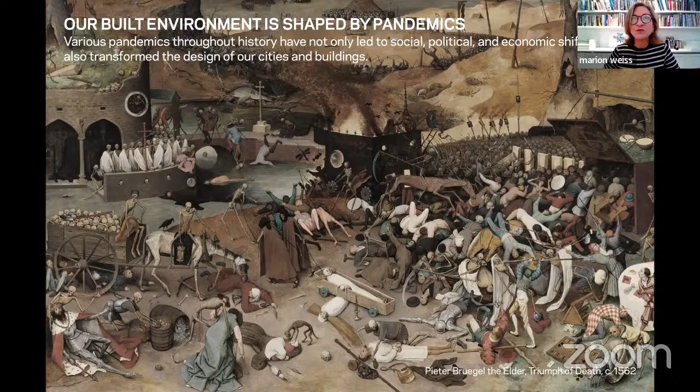In some ways, you could say the absence of breathing room sometimes catalyzes innovation. Think about the pandemics that have been part of our history, which have actually forged larger ideas about what healthy practices might be.

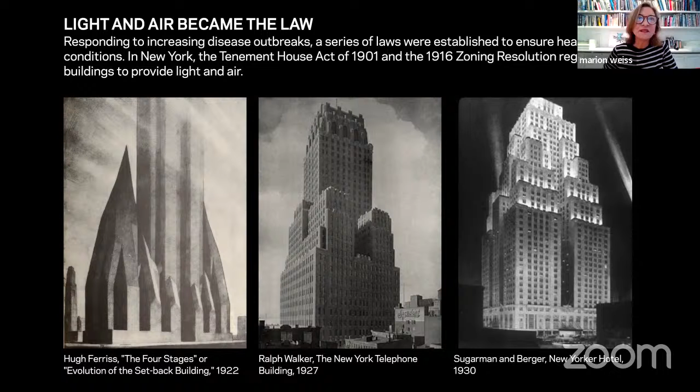Still isolation, or the 40 giorni, 40 days, was the origin of quarantine for people traveling to avoid the spread of bubonic plague. Again, these are ideas of tragedies enabling innovation, and the idea of light and air becoming law after various failures.

That expanded to larger ideas of urbanism, landscape, and ecology, coming into being with Central Park, designed with Frederick Law Olmsted's idea as an allusion to medicine, saying we need lungs for the city too.

That breathing room for the city has really forged an indelible relationship between high density urbanism and the opportunity for breathing room in our city.

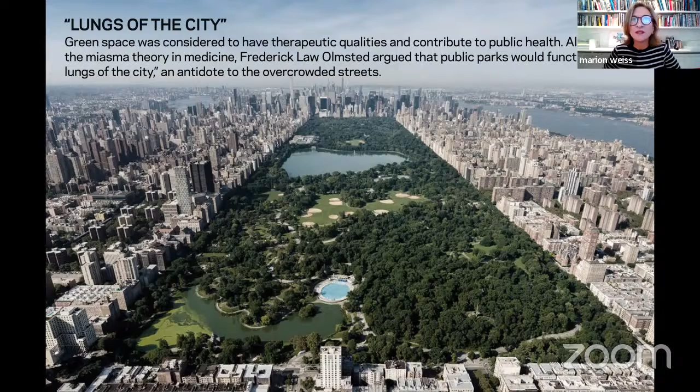A preoccupation that I've been exploring along with my partner is the question of what models exist that have a DNA of complexity—if you will, looking at Park Güell by Gaudí in Barcelona. We've been doing a series of drawings and studies to look at what multitasking infrastructures look like when they're open-ended.

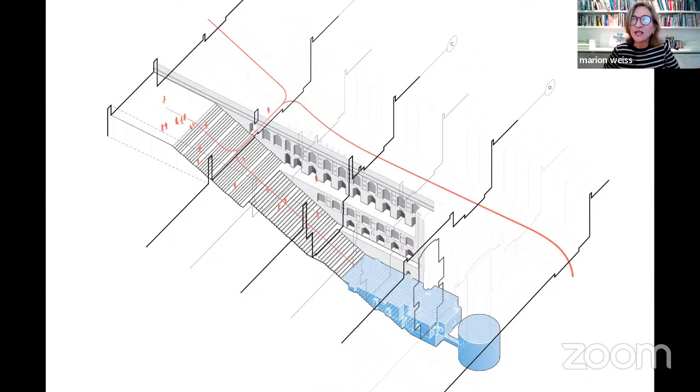And territorially expansive. This is the Khaju Bridge in Isfahan, part water retention and part social infrastructure. And Agrasen ki Baoli in New Delhi, India, formerly a place of water gathering, now a place of social engagement.

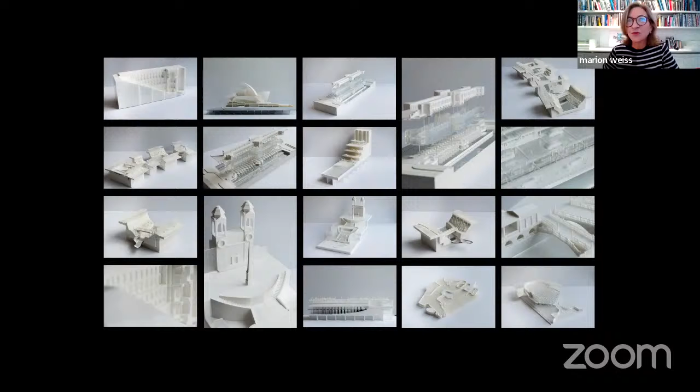This sort of examination—these are models done by my students at Penn, in part for exhibition at the Venice Biennale—looked at the figure, the volume, and the identity of spaces of multitasking infrastructure, both urban and architectural.

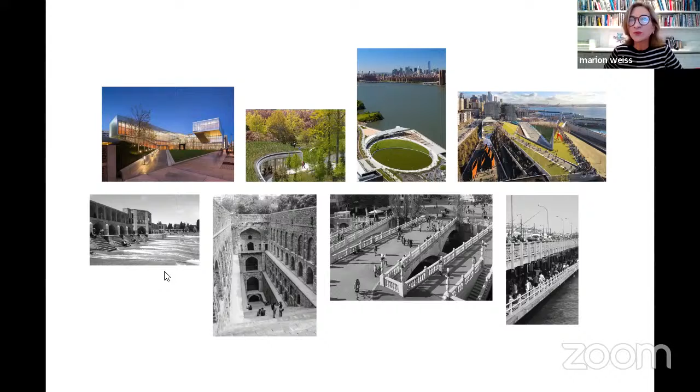Bringing this work to the Venice Biennale, we were invited to consider lines of movement in our work and in these infrastructural projects that have been originators of some of our ideas about multitasking infrastructures.

As we started to look at that, we wanted to create a space that had its own breathing room, where the dialogue between these sources of inspiration and our own work are seen not so much one-to-one, but in dialogue in the path of passage.

Constructing a setting or a room—literally breathing room—for these ideas to come together, brought these models and investigations into dialogue with our own models, in this case the Brooklyn Botanic Garden.

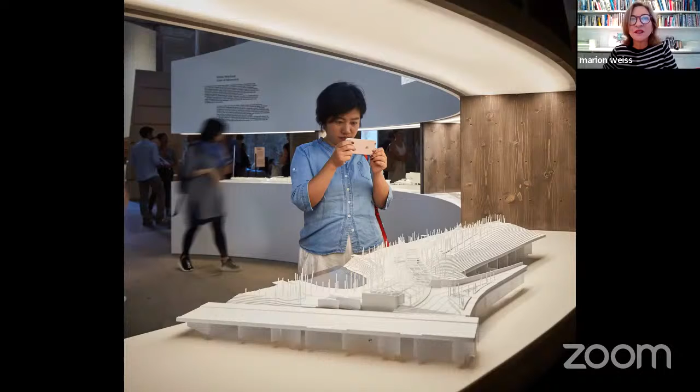That could be part of the journey people take walking through the Corderie at the Biennale, where they could walk through and discover these ideas of public natures and multitasking infrastructures.

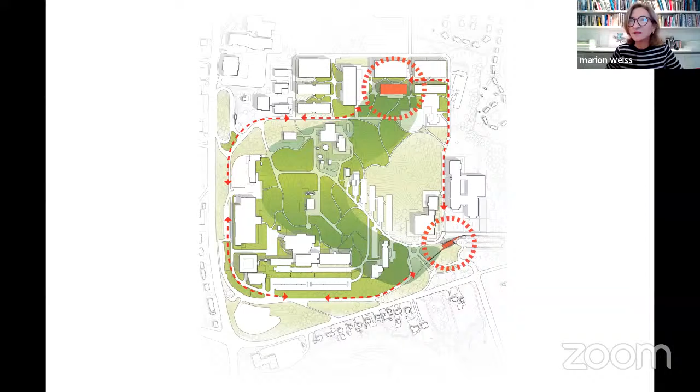One is for Novartis, a pharmaceutical company in Basel, where they were looking at their North America headquarters with new eyes, wondering whether their security entry was the right message for welcoming people onto their campus. We started thinking about what a gateway might mean on this topographically diverse campus, and began reconsidering the fence or barrier around the campus, needed for security, as a place of passage and shelter.

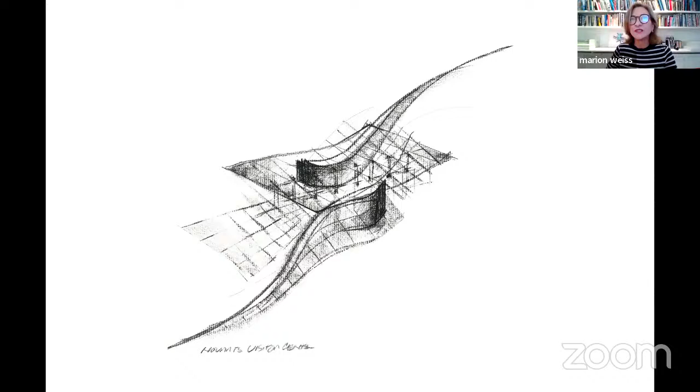As we looked at that hybrid between passage and shelter, we imagined it at night as a kind of celestial soffit, a luminous expression of welcome for the campus. It's a place where what was once a checkpoint is now, in a sense, a place of respite and pause, also a place of passage.

When one is literally on what we call the land side, like an airport's airside and landside security, there's a place to wait to be picked up by the shuttle that brings you through the campus. Again, what must be there as a fence for security takes on a different role as a topographic separation, one that stretches into the identity of the rest of the campus.

Now, the idea of creating breathing room for innovative thinking at Yale University came into focus in a very different way. The engineering disciplines, computation and science at Yale are newer and, in a sense, less expressive of what the campus has wanted to be about, which is a place of exchange.

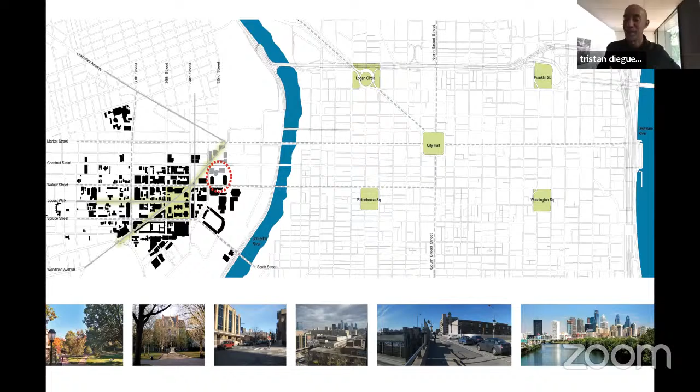Marion, can I translate the Novartis and the Yale projects? Sure, absolutely. Sorry for interrupting.

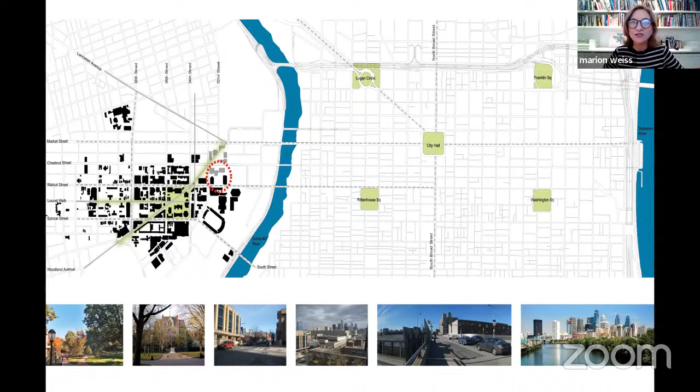And so when we looked at the opportunity here, we found that the site for the Singh Center for Nanotechnology didn't have any greenery, which had been so central to the development of the city of Philadelphia, but also to the identity of the University of Pennsylvania's campus. And as we looked at this site, which had been a parking garage, we realized that there was nothing about it that suggested it was part of the university.

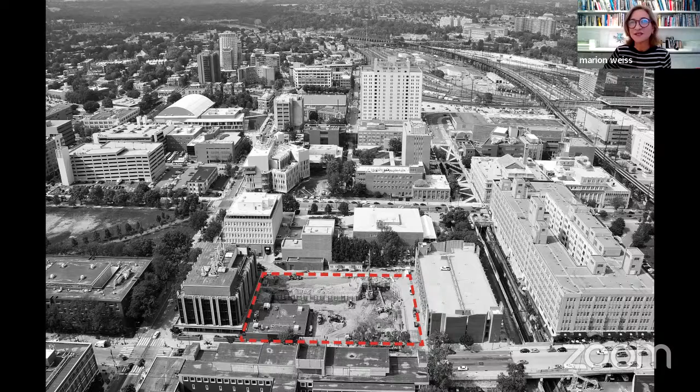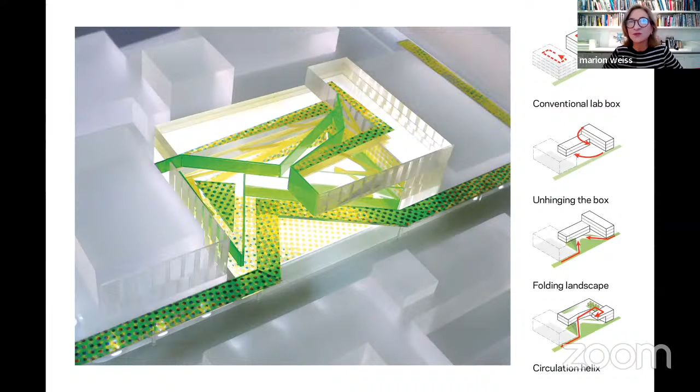And existing at the edges, we wondered what might enable us to look at the kind of constraints of vibration, electromagnetic interference, which is problematic for nanoscience, and use that need to actually push parts of those laboratory spaces away from those interferences to create an opportunity potentially for unhinging the kind of conventional laboratory box, to create a space that could include landscape and places of collaboration that could actually form a new identity for the campus.

And what's interesting here, and maybe hard to understand, is that it's very simple lab bars to our left and to our right. But the one element that didn't need vibration sensitivity tuned precisely was the place of gathering, which is that which is elevated to overlook the campus.

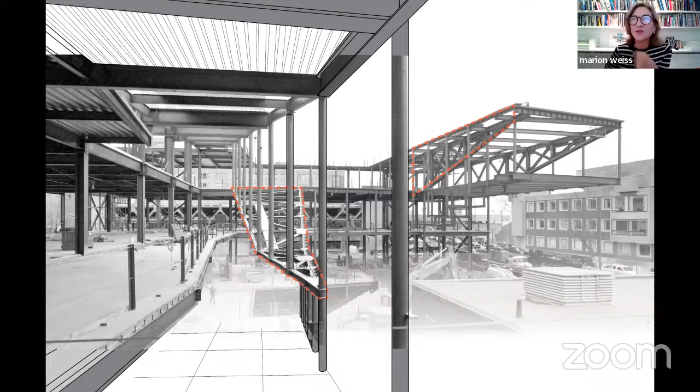And you can start to see that cantilever reaching out, but drawing you in. That engineering feat, if you will, is cantilevering on the right, but also hung on the left. So all these particular efforts are actually eliminating columns so that we could free up public space.

That public space in the entry area confronts you with a wall of orange or saffron. And in this case, this color is needed in the glass to protect the nanoscience and protect it from the ultraviolet lights that would destroy the research.

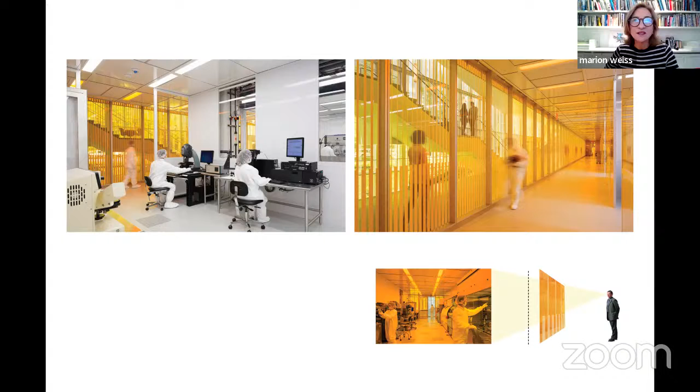And yet the people who are behind that glass now have a vista into the public area, into the landscape, so that their particular research and the engagement of people behind that wall can be shared, even though it needs to be separate, of course, for the kind of clean room requirements.

Because lab buildings are very tall from one floor to the next, and elevators need to be hidden very far away to avoid vibration and electromagnetic interference, a staircase needs to become a destination in and of itself, because most people will need to use the stairs. So for us, in this very long hike, we created collaborative terraces on that staircase that connected each level.

Similarly, we wanted to say that most scientists who tend to want to stay in their labs really need to be drawn together. By being able to see and be seen, those vistas across these many floors create a sense of community that can convene finally at the very top terrace with an overlook of those stairs, that overlook the campus and this room, if you will, which becomes very intimate while it's elevated over the campus and can actually capture vistas of the city.

That kind of ascending topography of forms is also kind of a crystalline, chameleon-like form with this externally acid-etched glass. We're also drawing light down into the lower level to enable the landscape to be the convening element from the city all the way up to the terrace.

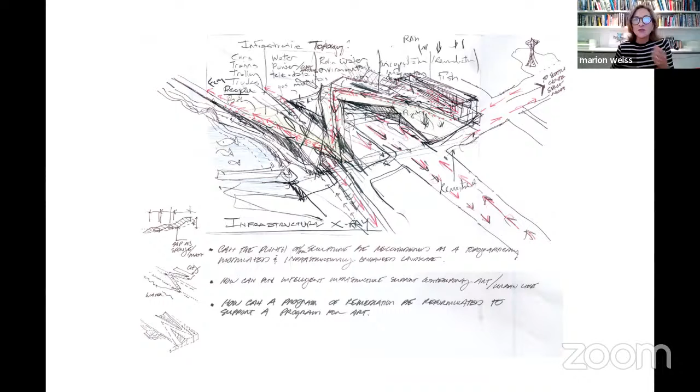In this infrastructural X-ray drawing, we started to think about what we ultimately were fortunate to be able to do: work with excavated land from a project downtown that had to pull earth out to create parking. We were able to take 200,000 cubic yards of earth to create this landform that could connect the city finally to its water's edge.

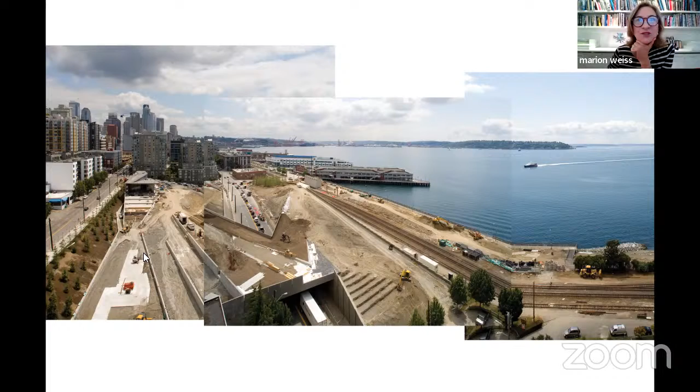Using highway construction techniques here, MSE or mechanically stabilized earth, we also created a series of concrete layered walls that are actually overlapping so that in an earthquake, they could still move around and not be damaged. But ultimately, it was about creating a topography that would enable art to have room to breathe and the community to have room to enjoy the Olympic Sculpture Park's vista, which are the Olympic Mountains, hence its name.

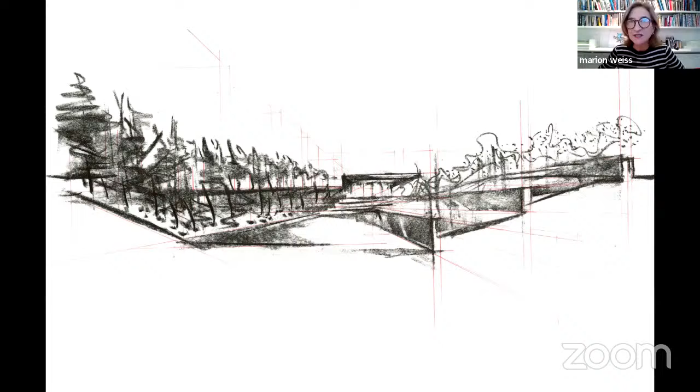But really, the possibility of becoming a new destination, inventing, if you will, land that didn't exist and creating topographies that could actually filter these separations and offer something new. You can see here, we were interested in that kind of valley area that we invented to create a place that was somewhat more intimate.

So Richard Serra's piece here, this great steel, Corten steel piece called Wake, is protected within the valley, looking up at the pavilion. And yet, while it might be somber on one day, it could host a jazz concert on another day, particularly in the summer when Seattle doesn't have much rain at all.

And yet the building itself, the pavilion, in many ways unfolds just the same way that the landform of the earthwork does. That earthwork is one that actually simultaneously enables you to drive into a garage on the left or ascend it to a crossing.

That crossing enables you to say that just as you're crossing the kind of highway overpass, that point is not something to conceal, but to celebrate, and in many ways enable those on the roadway to know that they're crossing under something that is not a standard overpass, but something altogether different, with Calder's eagle in the distance.

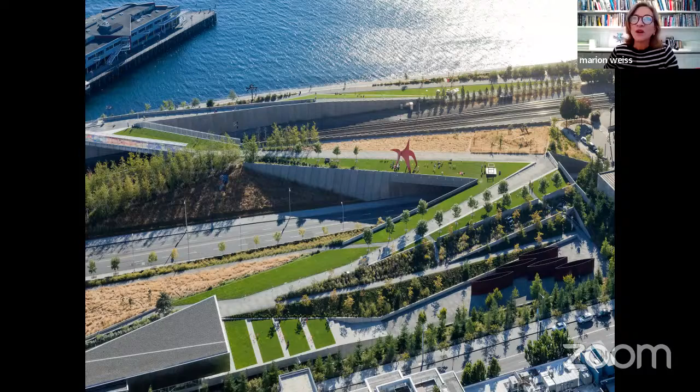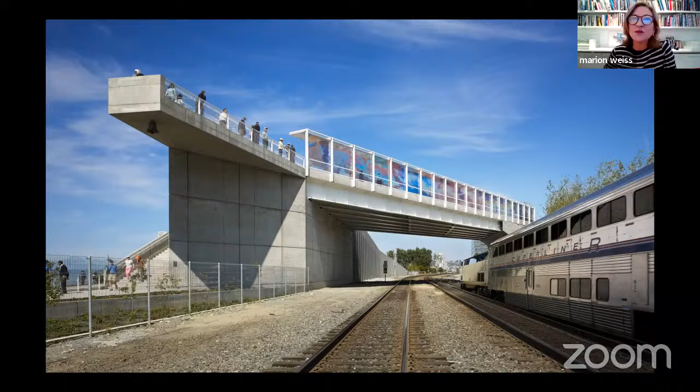Again, though, the simultaneity of all at once is what we're interested in—all at once and yet one at a time. The connections of art, landscape, trains. Here with Teresita Fernandez's work, Cloud Cover, we created a framework for her work where that Seattle cloud cover element could catch beautiful shadows on these walls, and in conjunction with these aspens, create an ever-changing chromatic identity for this waterfront landscape.

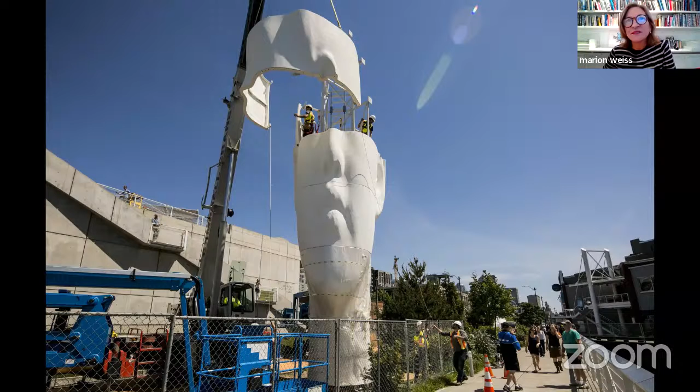And just where the seawall was collapsing and the Army Corps of Engineers said we couldn't build on this piece of property—here you see Jaume Plensa's work—we were lucky enough to finally get a federal grant to build something that would enable us to take this parking lot down and actually pull back the earthwork and the resistance to create a new beach that has salmon habitat in mind.

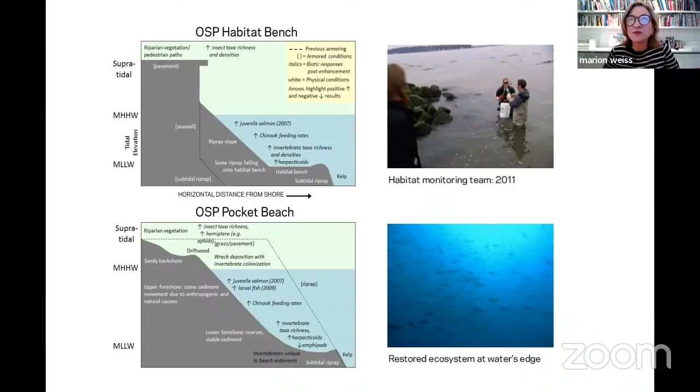And in so doing, creating an earthwork, an intertidal earthwork that finally stabilized the seawall and provided salmon habitat. In fact, they're still monitoring it—you can see it at a midpoint here, proving that juvenile salmon are doing very, very well. And yet that real opportunity for us is looking again at this idea of an urban infrastructure that is at once a place of respite, a place of breathing room, and a place of ecologies to connect the human condition.

So again, advocates, allies, and loose fit amplify peripheral vision. And I wonder, Tristan, do you want to translate before I jump in? Yes, I was going to ask you.

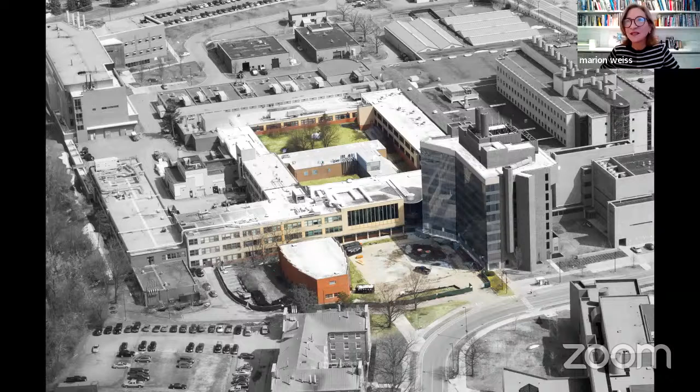When we were invited to think about adding new classrooms for the growing classes, we said maybe before we add something, we can take a few things away and create a place where the community can connect. So we suggested taking down four buildings in the middle of this strange campus, to create a place we might see not only as this kind of fortress of not very good tall buildings and something that looked like a strange hotel arrival, but actually turn it into something that felt appropriate for the Academy of Cornell University.

So we reclad the research tower, opened up the public realm for a library, and created a place of passage and landscape, a kind of water retention landscape as the point of arrival. Before, it was somewhat formidable, and after, you could say we had a chance to create something more compelling by taking what had been a back area filled with strange buildings that we removed, so that we could ascend now to a connected landscape.

So it really is a landscape to landscape connection, and an indoor-outdoor world that's wood-lined and warm, connecting on the right those in the hospital, and on the left those in the clinical labs.

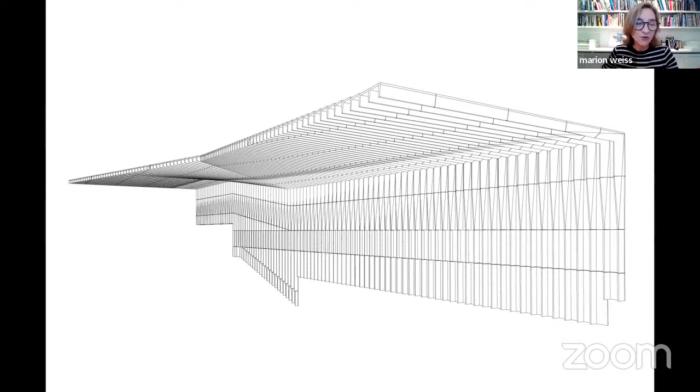But thinking about what it means to convene and create a kind of soffit of connection and warmth at Cornell, where it snows much of the academic year, became an exercise in looking at the possibility of something that could also be acoustically perforated in this very hard surfaced area, and then also baffle that sound, because they were going to be using this for many sorts of events and conferences.

So while most of the time it is enjoyed as a kind of loose fit place for gathering, it is also a place that can take the kind of high density traffic. Here you can see the acoustical wood and the fins handling sound, but offering an element of warmth.

And from the upper level, this is the public level for the hospital. It too has a sense of being connected as opposed to disconnected, because from the hospital, you're really opening back your vista to the core of the campus.

That sense of vista for Kent State Center for Architecture and Environmental Design becomes very different in this case, not so much about removing, but actually looking back to the history of this area of Ohio where factories in many cases had been abandoned. Yet the idea of these simple brick factories with their aerial lines of skylights was that they were great places of collaboration and production.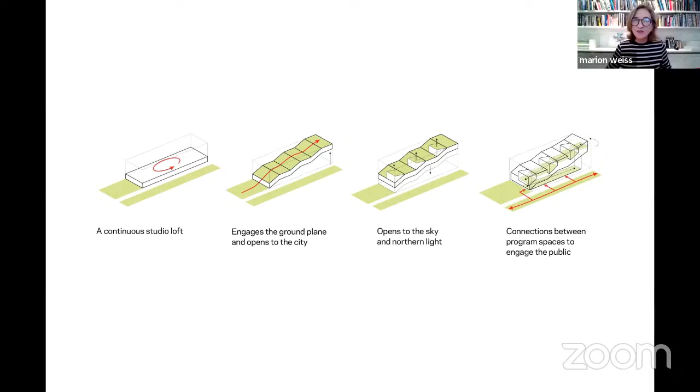For us, this became a model for the College of Architecture and Environmental Design to have a sense of being a new kind of factory, or a factory where people could see each other. In effect, whether it's one discipline after another or one year after another, not seeing them so much as hierarchically separate, but interconnected and woven together.

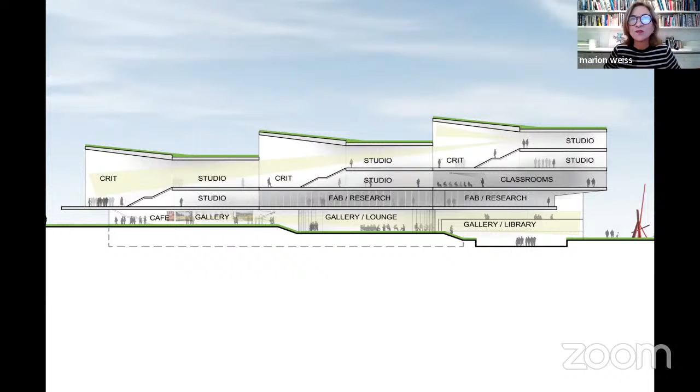So that section really became the expression of this new form of brick facade, really a kind of curtain that clads this architecture school, where the upper level studio spaces are this kind of crystalline lantern that at one end, which is very high, reaches the datum of the city, and at the other end, which is lower, reaches the datum of the campus. So truly as a connector, it's one where you can see the city beyond.

It is like a stacking Tiffany window, where the 24-hour life of the campus comes into focus when we are inside, a parallel urban street that leads you from the cafe or the event space up to the studios. And within those studios, there is a sense of panoramic connection and simplicity.

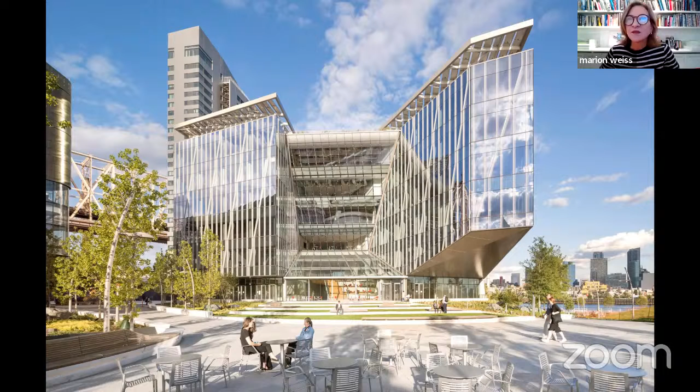Now, what's interesting for us is this was a building we really wanted to see as something that would crack open the complexity of what data science and entrepreneurship could look like, and create a loose fit environment here where a kind of amphitheater of the outdoors and an elevated structure could avoid the risk of flooding, since we're right on the river, and invite us into a place of collaboration.

We were inspired by the Spanish Steps, one of the precedents we shared at the Venice Biennale, where the idea of a kind of social convening could in fact create a more relaxed idea of what a lobby could be, so that you could be within eyesight at all times.

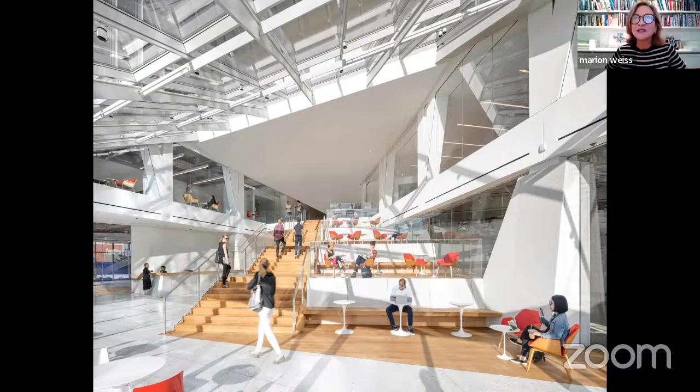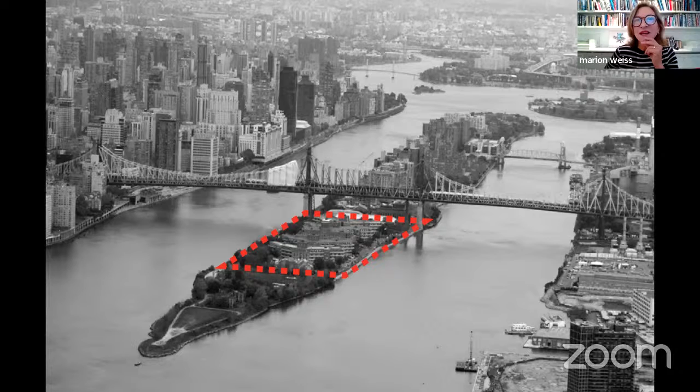Now, bringing it back again, we need to wind it back, because what we don't know is that it had a history that went back. It was a history there for an institution for jails. It was a place of river-to-river views. It was a place that had an idea in a master plan of something quite wooden there that denied anything that had to do with it being on this unique site.

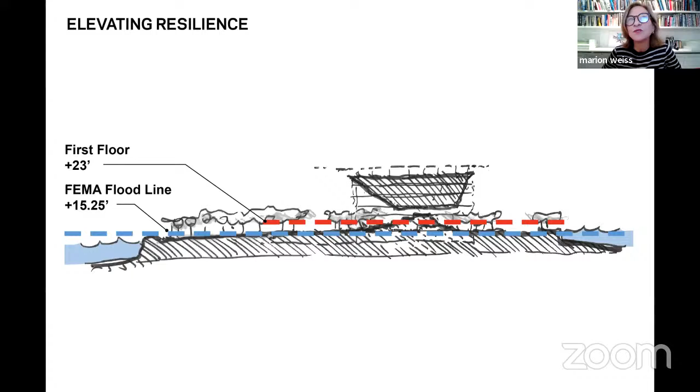So if you wind back, you can start to see the conceptual premise here was to crack open that strange planning diagram so that the river-to-river views and the escape from flooding, which I spoke about, would be the fundamental underpinning. And then the ascending idea of a kind of collaborative indoor campus would then indeed create the premise for this.

Which is enabling us to give as much over to landscape as we can, while we also create a column-free environment that is, in a sense, this whole place of loose fit and aspiration coming together in one structure.

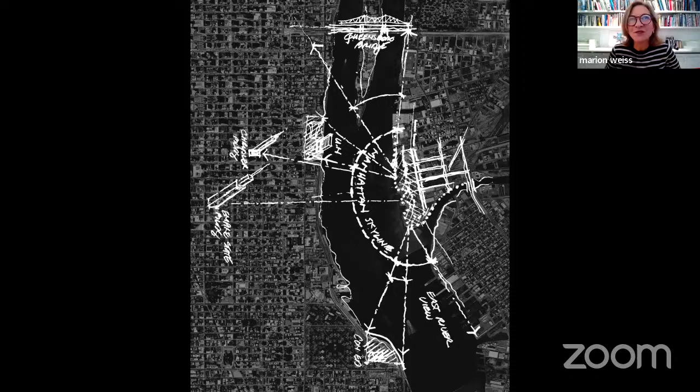This is Hunters Point South Waterfront Park, and it's a place in many ways. If you could see at the very top of the drawing, you can see where the Tata Innovation Center is with the Queensboro Bridge. But as we come down the river, there's a place where more panoramic views are possible. And yet, if you look at the site, it was a contaminated industry site as we discovered it. And yet it had been a site of wetlands at one point, of great dynamic industry, and then in many ways, ultimately abandoned because industry moved out of New York City.

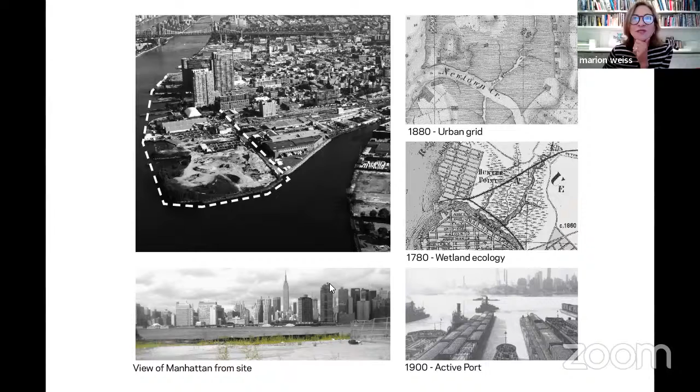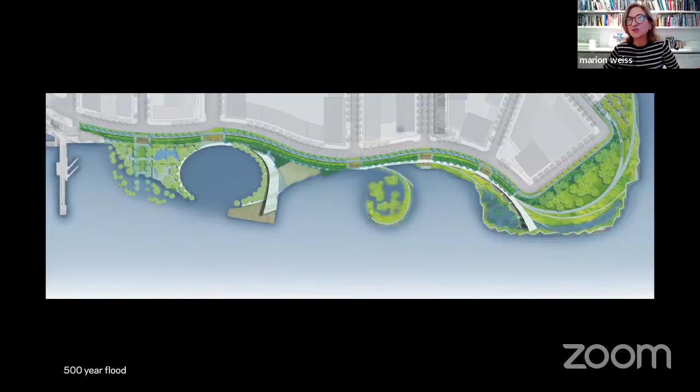It also was subject, just as I mentioned with the Tata Center, to flooding. And so as we start to think about what it means to build a public park, and in this case it was a park built in advance of the largest urban development plan for affordable housing, our question was, how could we take this strange idiosyncratic water's edge and embrace flooding, so that the temporal quality of sometimes dry and sometimes wet would not so much destroy or damage, but be part of the dynamic of the project. So you can start to see here, in advance of any development, the Bloomberg administration in New York said...

Let's build something compelling so that developers who are taking some risk when they do affordable housing know that there's a valuable destination to make this compelling. You start to see here in the first phase, which was built five years before the second phase, we were excited about creating some legible destinations within this idiosyncratic edge, and put into focus some things that could be universally understood, but also brought into focus the horizon of Manhattan.

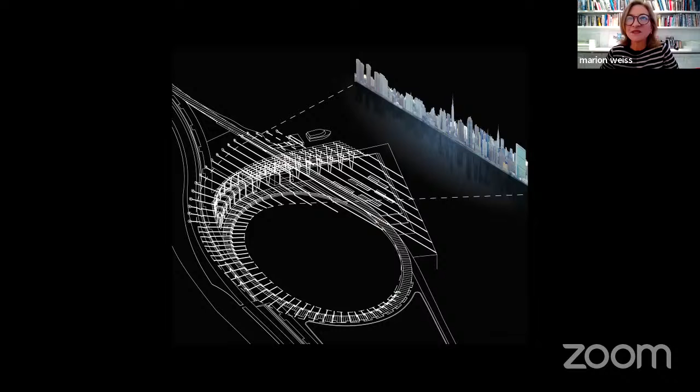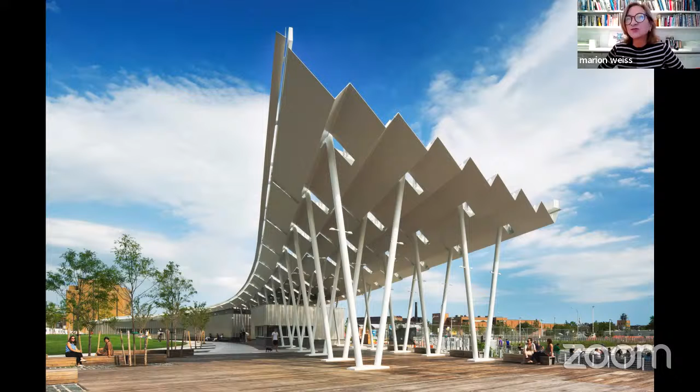And as we created this public green here, particularly it's a playing field for the school across the street, it's one where this single structure collected four different program requirements: restrooms, concessions, offices for the park, and also a shelter for the ferry terminal, so that all of these could come together and become a new form of infrastructure, collecting sunlight on the solar panels to power the lights in the park, and also descending down to collect the water to assist with irrigation.

And as we look at that, it together frames this new public green, and invents a sidedness so that another side could actually host Water Taxi Beach's new form here, which is a kind of family beach. And yet, as we look at this sheltering structure of the pavilion, these views of the Chrysler Building in the distance are really pretty unique.

And then you could see, in a sense, the promise of phase 2 were these strange landforms of hilltops, which were unusual. And we started to think, what would happen if we could have a multi-level park? In this part here, we wondered if we could also restore the possibility of wetlands.

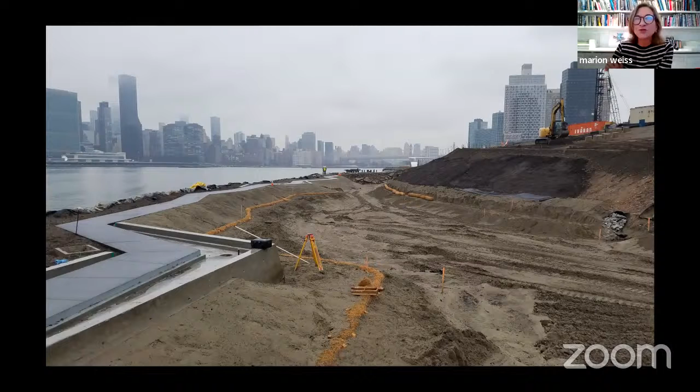As you remember, I showed the kind of fortified city at the beginning, that utopian ideal of protection, to keep something out. In this case, we created a fortified edge that could also help to keep something in, which is the success of these wetlands. And you can start to see that wetland landscape protected by this walk.

In the distance, you can see the overlook. But what becomes super interesting about that fortification is that when the water level is high or when it's flooding, you have this sense of literally walking on water, which is something you can do nowhere else in the city.

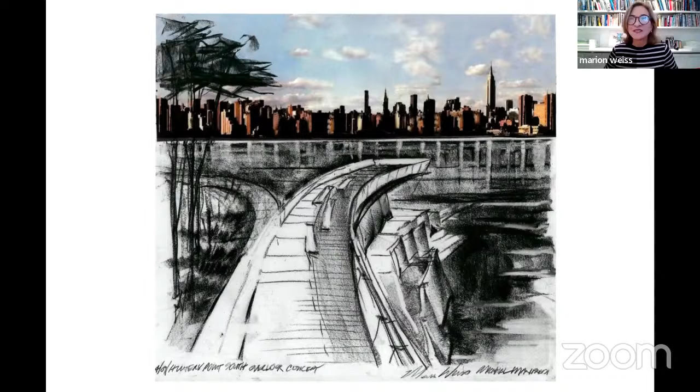And yet what becomes very interesting for us is to think about this kind of multi-level experience that is at once civic in scale and much like a ship, if you will, looking out on the water, but also very private at the same time.

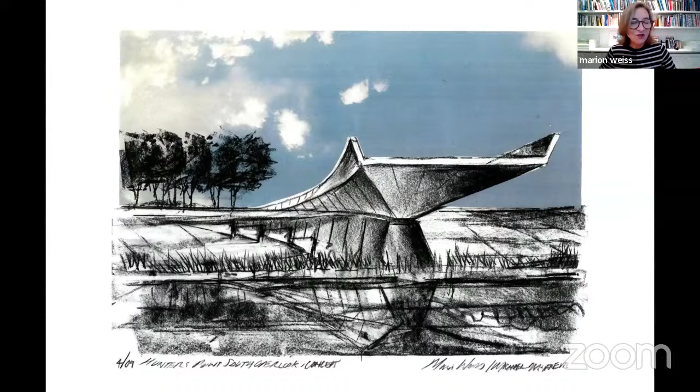And these are our drawings that we're really looking at this idea of both landform building, but also elevating from those landforms a new destination.

We're lucky to work with shipbuilders up in Maine to create a structure that could be brought to the site, assembled, and then hoisted up, and literally finally land and form this incredible overlook, if you will, over the kind of wetland landscape in the fortified walk.

And yet what we're as excited about, in terms of the large-scale urban ideas, are the kind of intimate discoveries, welcoming the incredibly diverse communities in the city together as a place of discovery.

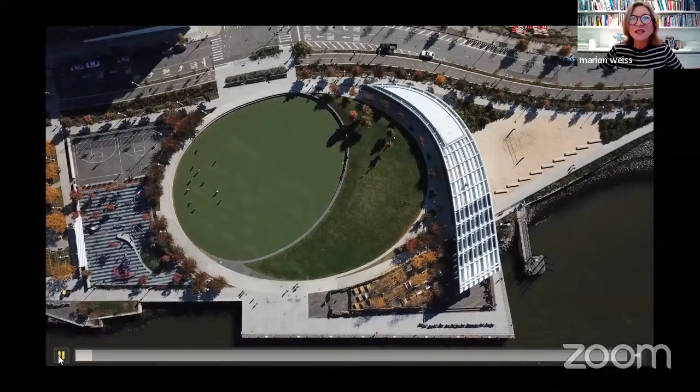And so you can start to see here a short film.

What's intriguing for us is that it really is a place of exchange, as a place for the ferry stop, as a place for athletes to get together, as a place for school children to come and have meals, an inexpensive gymnasium, or in some cases, just a place where the willows that we planted on the wetland area and in these walkways are really new nature that had never been there, and yet will over time feel as if they have always been there.

And this kind of simultaneity of both infrastructure, urbanism, and protection are what come together in this particular view. And we're very excited that the Museum of Modern Art is going to be featuring this project in February in an exhibition that they have on New York.

So again, if we start to think about an upcoming project, we're very excited about the competition that we won not so long ago for the La Brea tar pits in Los Angeles. And if any of you have ever been to Los Angeles, you might know that tar is the defining nature of that city. In the Pleistocene era, more than 40,000 years ago, it was the very oils that captured and preserved mastodons and mammoths, seen in contrast to the city of Los Angeles in a hurry to define its future.

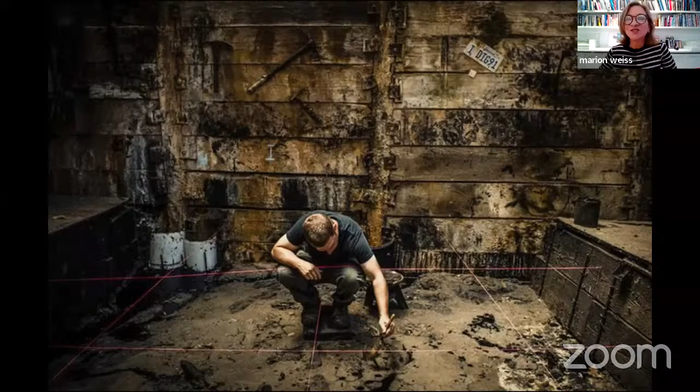And so at the Page Museum, you can see this kind of strange set of fictional landscapes showing how mammoths and mastodons got stuck in the tar pits, and because of that, their bones were preserved. And yet that image, which is fictional, is side by side with a real research site, because over 360 days a year, they're actively excavating this exact site to find the kind of legacy of our history. And that particular history is in storage and unseen.

These dire wolves and mammoths and saber-toothed cats are the coolest things you could ever imagine seeing, and yet they're completely hidden. So as we started to think of the earthwork that is the Page Museum itself, we started to think about this site as something that might connect the active research, the museum, and the culture of discovery, and think about the threads of Los Angeles's history and La Brea tar pits history as something that might be interwoven together. The strangeness of this site—some of you might recognize Zumthor's LACMA silhouette there in the lower left—research is in the upper left, the community comes together in the central lawn, and this kind of strange fictional edge on Wilshire Boulevard comes together.

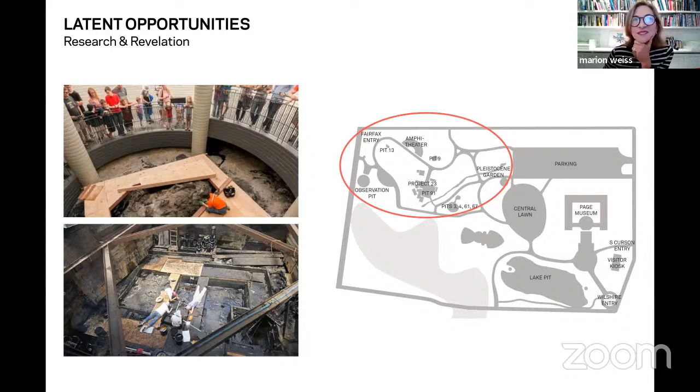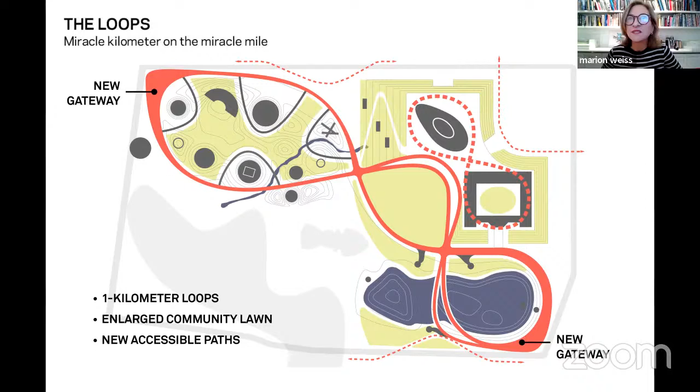If we could put into focus the distinctions of what happens here—research and excavation, community and convening at the museum, and these kind of fictional landscapes which have been in many movies as well—what if we actually think about all of these in new and intensified ways, but fully interconnected? This idea of research and revelation, community and culture, spectacle and urban fictions becomes one continuous kilometer loop that enables this to be viewed as a place of discovery of the Pleistocene, which was the era 2.5 million years ago, which is preserved; the Holocene, 12,000 years ago, which has a kind of microclimate that we could amplify; and the Anthropocene, which is the present.

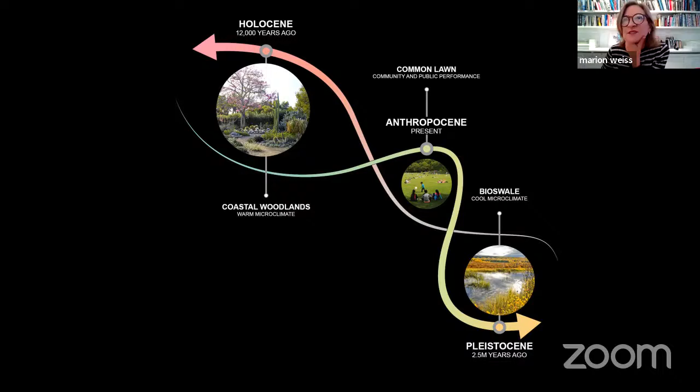Looking at those all together, this kind of tapestry of growing upon what has existed there, and expanding the museum, and also reaching out to Wilshire Boulevard, which is LA's Miracle Mile, enables what had just been a barrier or a passage, or just a window into the park, to be one that could be a portal—almost like a construction fence portal—where we could actually imagine what it's like to enter the park.

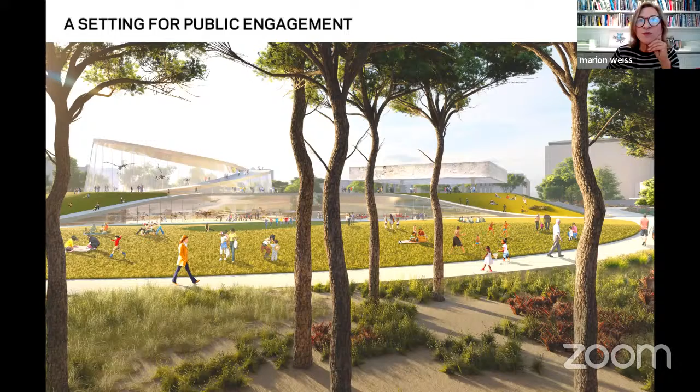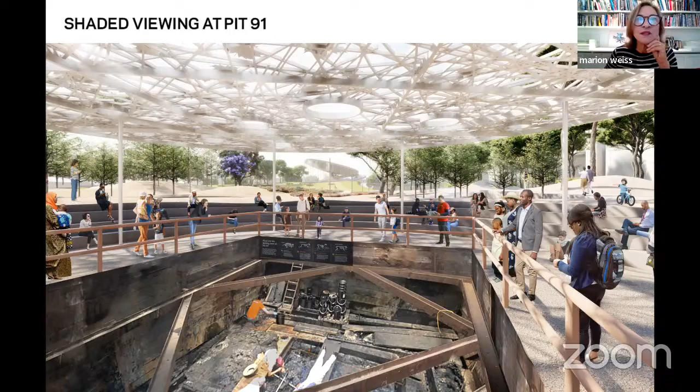And in this case, actually come from the world of science or the kind of community engagement and carve open that berm to look into this place, and actually reveal that hidden collection and shelter the research, which is actively underway at Pit 91, and expand the museum to have a kind of twin engagement so that exhibition now could complement research.

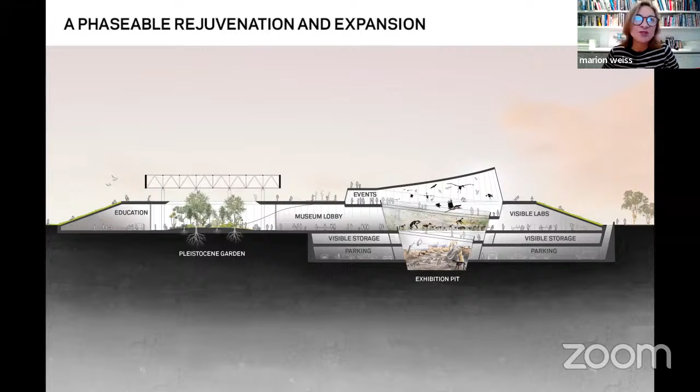If we look at this phasable kind of rejuvenation and expansion, it really is the idea of this exhibition pit in the Pleistocene garden, taking what had been previously collected and hidden and enabling it to be something that we could actually access and discover in new and intimate ways, and enable that sort of sense of excavation and revelation become something that joins the kind of active laboratory work that is literally happening within the museum.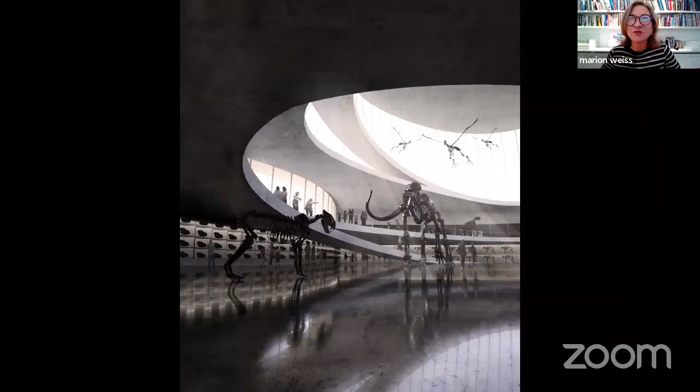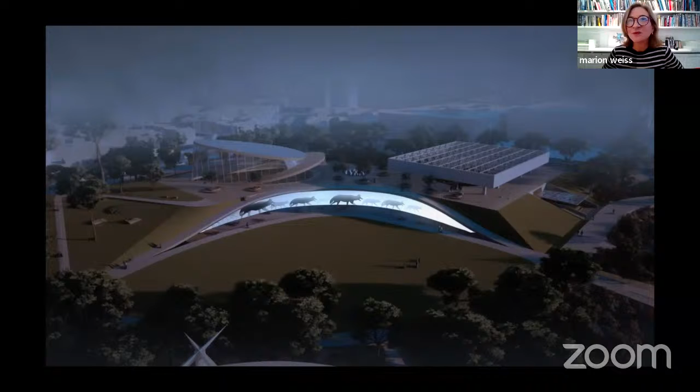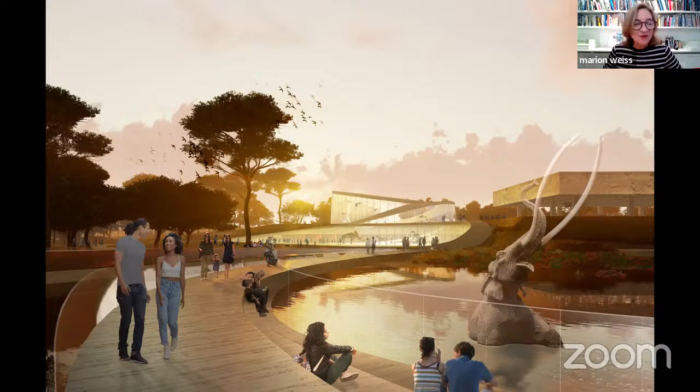And then the kind of profound discovery that somehow this tar has fully protected these specimens so that we could discover new futures. And in fact, it's a community green, and LA is starved for parks. So what if this particular park is unique and special to what LA is so known for, which is telling us stories that are both fictional and real—so that we might see that story of the Pleistocene kind of in motion in front of us, changing, almost like a drive-in movie becoming something that is super Hollywood. But not Hollywood, in fact, at all, because it's more real than any other part of LA.

And as we cross the lake pit here, the idea of coming off of that urban street and being brought into the context of this place of discovery is really what we're very excited about. We're working on the schematic design right now as we speak, and hopefully before the Olympics in Los Angeles, you'll be able to visit.

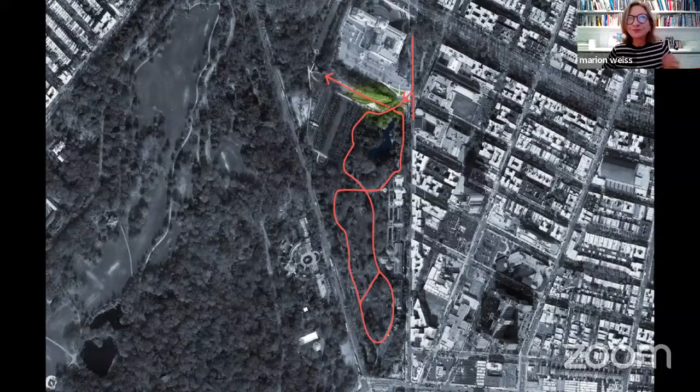The Brooklyn Botanic Garden is a very special landscape, but we started thinking about what the visitor center might be, because we didn't want something that would intrude in the garden, yet we wanted something that would be a threshold between the city's edge and the beauty of the garden.

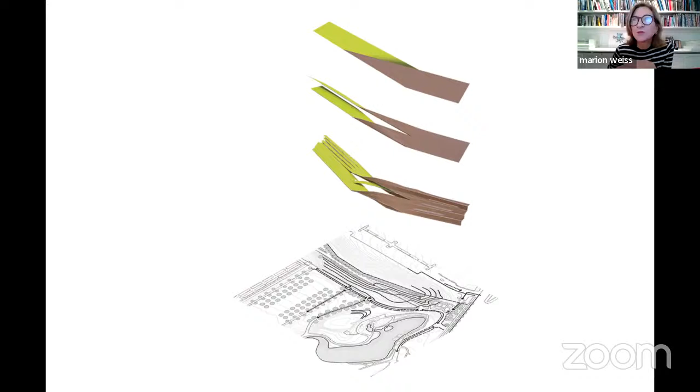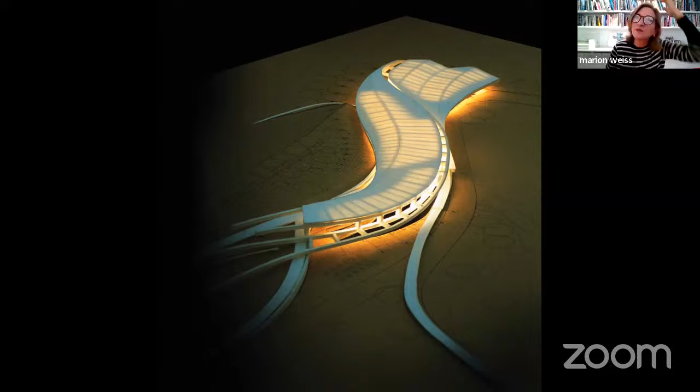So we played with origami and wondered about something that would at once be 100% urban and 100% natural, seen at the threshold of this strange urban edge with the beauty of the garden inside. We thought of something that could move slowly and unfold, just as Olmsted's paths wound for discovery, creating something that would be a place of movement and inhabitation, but also a kind of dynamic chameleon section.

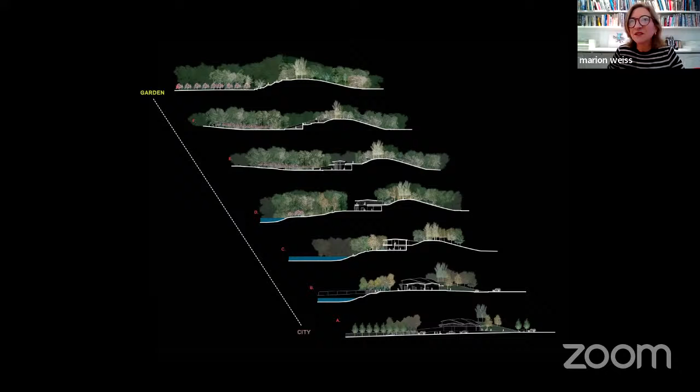At the very bottom you can see it's 100% urban, and at the very top it's 100% natural, from city to garden. This idea of a cadence, almost a sectional ribcage of change, means we could be welcomed from the urban edge here in a plaza that felt 100% urban.

In some cases these curves have to do environmentally sensitive things, following the drip line of this cherry tree to make sure the building and its foundation never impact the growth occurring in the garden. Inside the visitor center, we wanted it not to be enclosed, but to always tempt you through transparency to join the experience of being in the garden.

Even where we need an event space, it is a two-sided room embedded in the hillside. If you look to the upper left of the slide, you'll see it's really embedded in the hillside, but enabling a public route above to look into the event space and through to the garden. That strange kind of topography is lifted and elevated here.

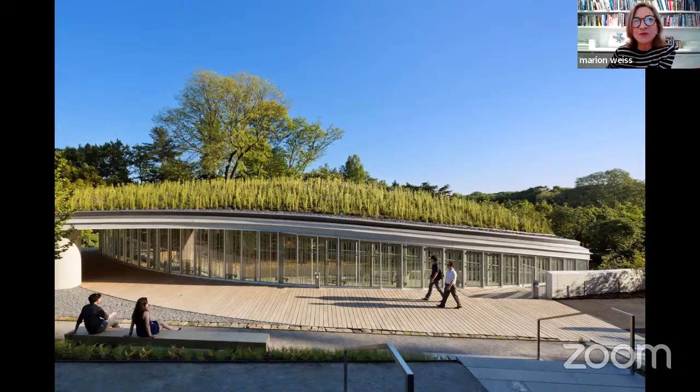So that journey, from the entry near the subway on the other side of the garden, is one where you could actually pass through this elevated portion of the building. That simultaneity of being 100% natural above and part of the urban topography below is seen in this sectional moment that is at once a place of gathering and public engagement as it is a place of nature.

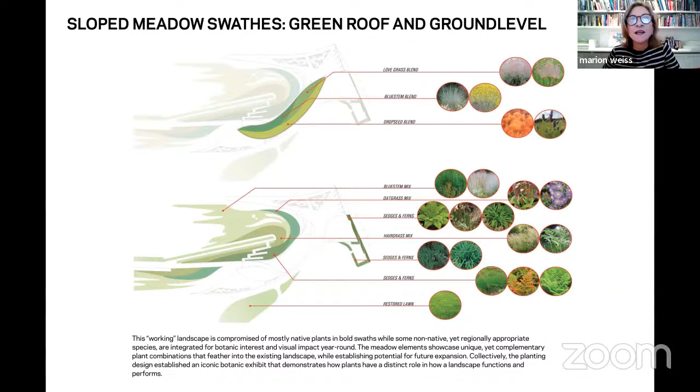The garden is very interested in having every structure, whether natural or artificial, be part of their ecosystem. So the green roof runoff, the rain garden, and the transfer to the detention area are part of the systems. Our new roof is a 10,000 square foot green roof, a swath of meadow that is a new garden, experimental in nature.

You could see the kind of grasses. We spent a year experimenting with the garden on what might thrive on this green roof, and a few things thrived that were unexpected. In this case, you can start to see, in a sense, a new landscape for nature.

And yet, if we look at this building now, it really tips its way into the garden, just barely there as a sliver of engagement, luminous if you will. And yet if one was arriving from the subway, you might even miss the building.

This particular view led to a question: at 23, 25 feet higher than the garden, the subway entry was not at all accessible to the garden. We love this idea of being accessible at all times, and being visible from, say, the Japanese garden. And yet this whole idea of urban connectivity, which happened so easily at the major entry, happened less easily here.

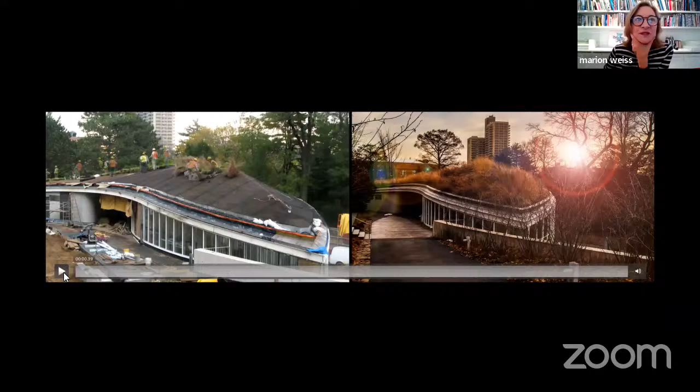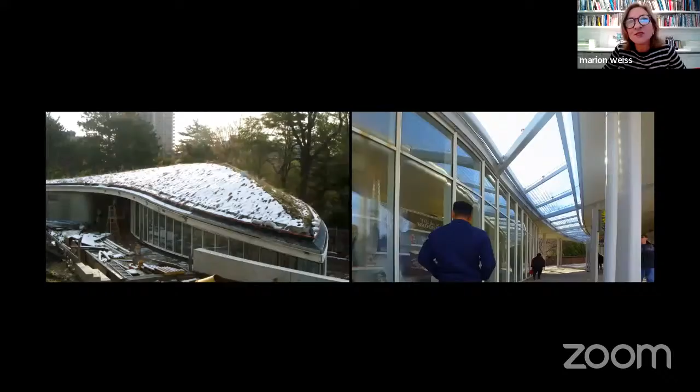This gives you just a little window here of the construction of this particular roofscape. You can start to see that it's really meant to be seen as a place of movement at all times, and a place of change.

And as a place of change, one where the upper landscapes and lower landscapes are equally valuable. So that kind of sectional topography or dynamism really came into question as we went further into the garden.

There was a failing wall that had kinds of erosion. If you look at the very top, that's where the subway entry is. So there was no way a wheelchair could ever access the park with any kind of ease.

There were suggestions for accessible ramps, many inspired by the ramps we had at the subways in the city. And yet we thought, along with the garden, there might be a new opportunity to think of a journey that would not be just an ADA ramp, but in fact a 1,000-foot journey that could be an inhabitable garden.

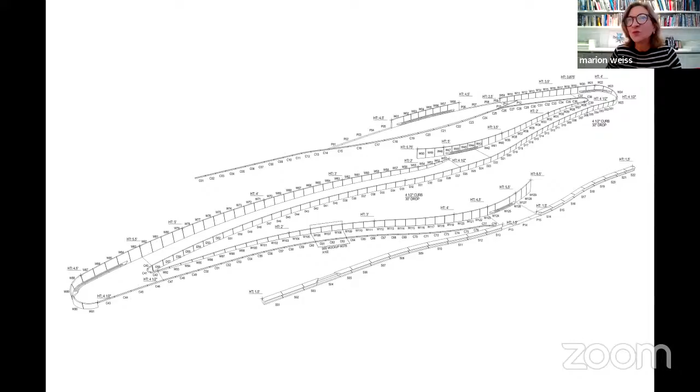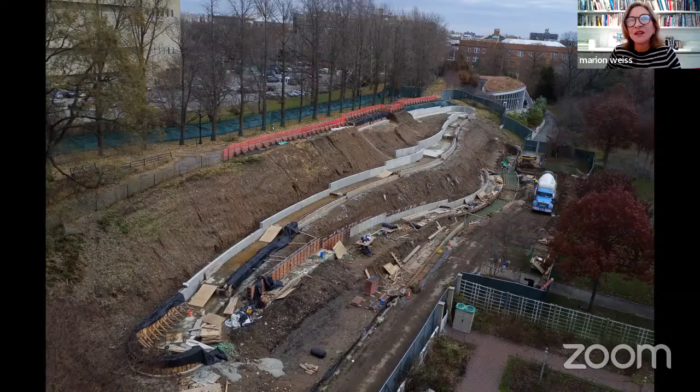So one was never thinking about that wheelchair route as something that was just a wheelchair route, but thinking about a tapestry of a garden and a new experience that was part of arriving in the garden, one where you could see together that journey of the city and the garden being seen together.

We got a grant from the Robert Wilson Foundation with the garden to create this new landscape. What became very interesting for us was saying that rather than the eroded landscape, if we create these new retaining walls, we could at once create a journey or a walkway, but also simultaneously create a place where a garden could thrive.

And that thriving, for us, particularly during the pandemic, when it became so clear to all of us in the city that we all needed room to breathe and needed to connect with nature. For us, it was an incredible joy to see that when it first opened, this was one of the big destinations for the community to come together and reconnect with nature and with each other.

So finally, I'll close with the words that, in many ways, we are never working with pure sites any longer, particularly if we want to engage the public realm. For us, it's really an honor and a gift to be able to be part of these urban projects that have larger aspirations beyond just being privatized, but in fact connecting with a larger realm.